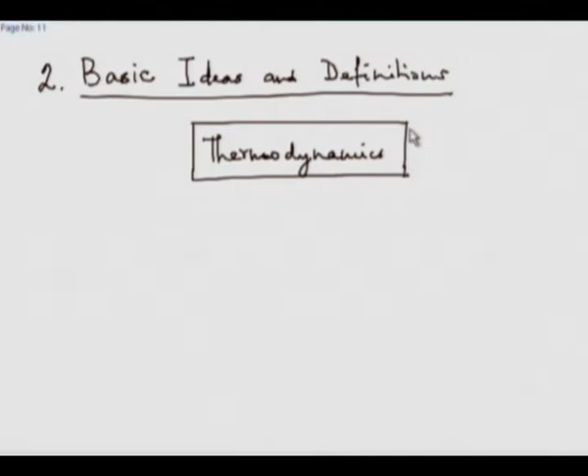But thermodynamics doesn't remain in an isolated box. It's a proper part of science, maybe a very proper part of physics. So it works with other branches of science: physics, chemistry, solid mechanics, whatever you have. You can't develop thermodynamics in isolation from other branches of science and other branches of physics. You can't study thermodynamics unless you study something in mechanics, something in fluid mechanics, at least the basic stuff. Something in geometry, which is also, in my opinion, a part of physics, on the borderline of mathematics and physics.

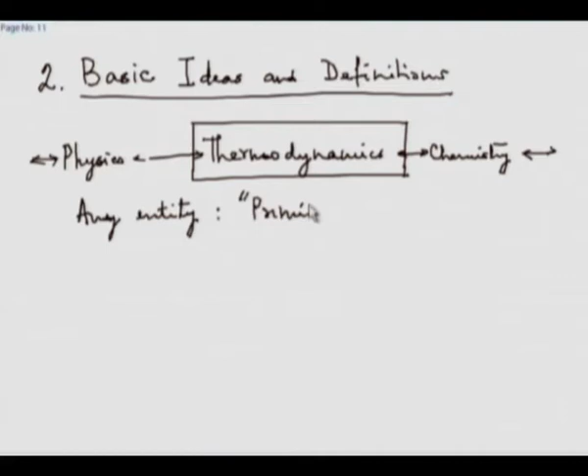So although thermodynamics defines its own ideas, thermodynamics inherits ideas from other branches of science, particularly other branches of physics. So any entity in thermodynamics, a property, a definition, an idea, a concept, will be called a primitive in thermodynamics. Primitives are those ideas, concepts, properties which are inherited or obtained from other branches of science: physics, chemistry, mathematics. Thermodynamics says, well, these ideas are defined in, say, geometry or mechanics or physics or electricity and magnetism. We know what they are, let the other branches of science define them and explain to us their characteristics. We will simply use them in thermodynamics as required.

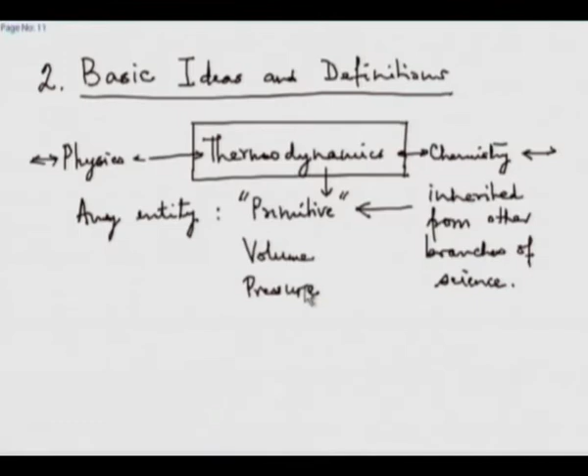So the ideas like volume, pressure, velocity, etc. These are all primitives in thermodynamics. We will not define a volume in thermodynamics. We will not define pressure in thermodynamics. In physics, pressure is defined as force per unit area. We will say that, look, physics says pressure is force per unit area. We will use it like that. It's a primitive for us. No contest. It is defined well by some other branch of science and we will use it.

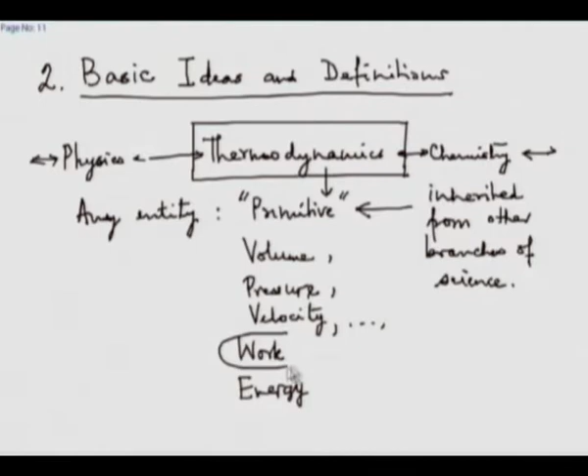There are some ideas which are not really primitive but are on the borderline of primitive. For example, the idea of work and the idea of energy. These are defined in other branches of physics. For example, work done when a force is applied against a spring and the spring gets compressed, very properly defined in mechanics. Okay. So the idea of work is a primitive, but thermodynamics will formalize this. Similarly, the idea of energy is also defined in branches of physics. For example, you have a mass, and with respect to a certain datum, it is at a height in a gravitational field. So, mass at a height has a potential energy that is defined in mechanics. We inherit that and consider that to be a primitive in thermodynamics.

There are other components of energy, for example, kinetic energy of a particle or a body moving with some velocity v, or an extended body rotating about some axis. This has a kinetic energy of translation or rotation associated with it. A fluid flowing has a kinetic energy associated with it. That is primitive, but will also be formalized in thermodynamics. Work is a primitive which will be formalized by thermodynamics. Energy is a primitive which will be, let me say, redefined by thermodynamics. But it is necessary for us to be very clear about what are the primitives in thermodynamics, because we are not going to spend time on primitives. We will say this is a primitive, that means it is defined by some other branch of science, typically physics, and is used in thermodynamics.

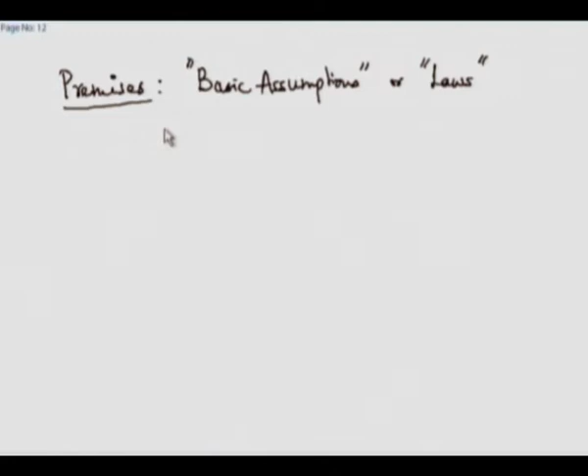Similarly, the idea of mass, the characteristics of mass, is a basic assumption in mechanics. And particularly the laws of Newton. In classical mechanics, there is no proof for the laws of Newton. They are basic assumptions of classical mechanics. The whole of classical mechanics is based on that. So these are premises which are basic laws. For us, there would be a number of premises. Our premises in thermodynamics, there are many. 3 of them are famous as the laws: zeroth, first and second, in some order.

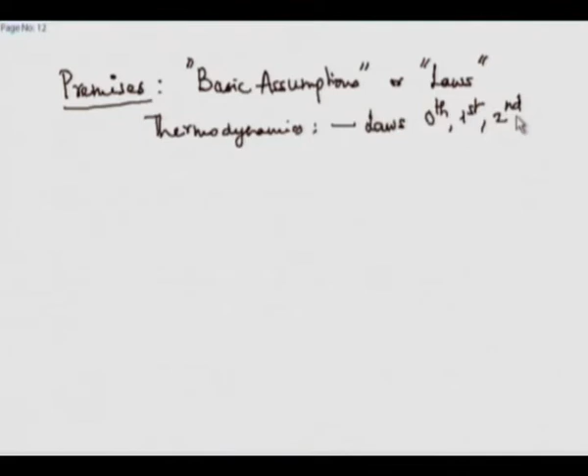But there are other premises in thermodynamics which for some reason have not yet been given the status of laws, but we will look at them as we proceed. For example, one premise is: any isolated system tends towards equilibrium.

This is a premise in thermodynamics. We say that if you wait long enough and don't disturb a system, keeping it isolated, we will find that it will reach a state of equilibrium. This is a premise. We have not yet defined what is a system, what is isolated, what is equilibrium formally, but since all of you have a background in thermodynamics, you at least partly understand what I am talking about.

There are certain other premises which are known as state postulates. This is one of them. Another one which we will come to is a premise which we are not conscious about, but which says that the state of a thermodynamic system can be defined using only primitive properties. Okay. This also is a state postulate. It is a postulate, it is an assumption, it is a premise. For some reason it has not been given the status of a law of thermodynamics, but unless we make that assumption we cannot proceed significantly in our study of thermodynamics.

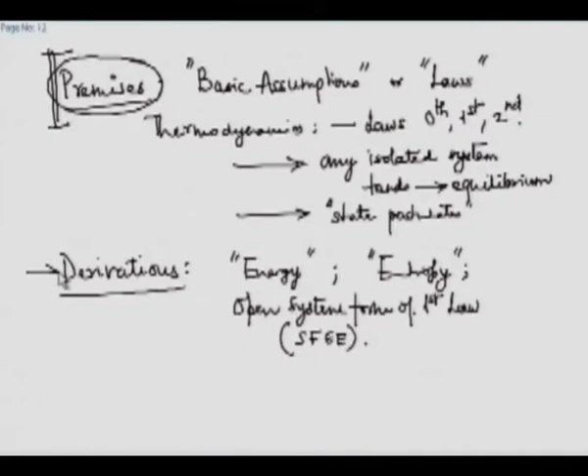Similarly, the open system form of the first law of thermodynamics, what we call the steady flow or steady state energy equation, is a derivation. Then the formulae you have for availability, exergy, etc. These are all derivations. Okay. Property relations, Clausius-Clapeyron relations, these are all derivations. So that is one part of thermodynamics, but the real understanding comes in appreciating the premises and undertaking the basic derivations as required for thermodynamics.

Now we come to definitions in thermodynamics. See, they say that a picture or a sketch is worth 1,000 words. But if we start using pictorial language, I think people will get very confused. So we have to use words and we have to give very specific meanings to those words. We have to define things like a system, we have to define a thing like a property, we have to define a concept called interaction. For all these we have to provide a definition, and we will be using definitions of essentially two kinds.

A definition, we say, is an explanation of something, so that something can be very compactly said in a word or two. So if you ask to define a human being, the definition of a human being will require something like 30, 40, 50, maybe more words depending on the detail you want to provide. But once that is understood, everybody understands and we can make out whether I am a human or not, whether this pen is a human or not. Okay. So we will be having definitions of essentially two kinds. One is a definition which is a short form.

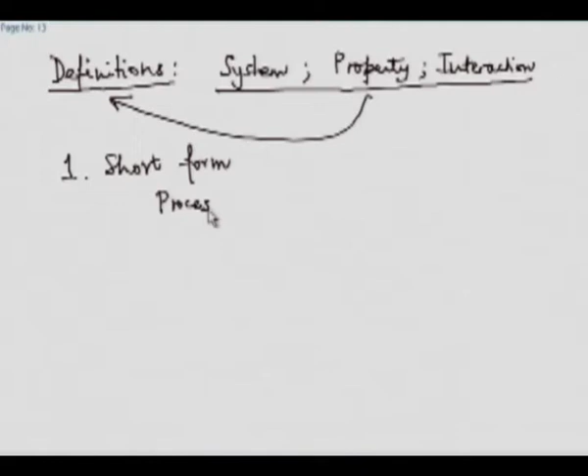For example, we will come sooner or later to this definition. We will say a process, a thermodynamic process, will be defined as, and I have this habit of writing 3 lines indicating that what I am writing is a definition, nothing but a change of state. That means that in any sentence, in any discussion, wherever I see the word process, I can replace it by the expanded form change of state, and the meaning should not change and will not change. Similarly, wherever I see change of state, if I have defined that as a process, I can replace change of state by a process.

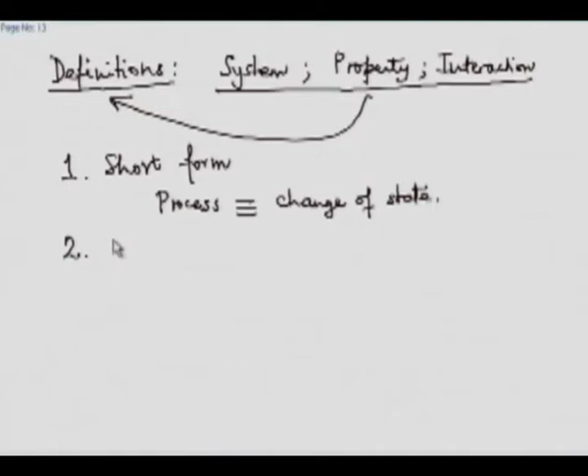These are absolutely equivalent, just the way 2 is equivalent to 1 plus 1 in mathematics. So, you can say 2 is defined as 1 plus 1. So, wherever in mathematics you see 2, you can replace it by 1 plus 1, or wherever you see 1 plus 1, you can replace it by 2. So, these are just short forms. The second one, and perhaps the more important one, is an operational definition.

Now, an operational definition, as the word goes, defines something, a property, a characteristic, a procedure, whatever, by defining a set of operations to either take a decision or to make a measurement and quantify.

For example, black. I say the color of this pen is black. What is the operational definition? I say that in any form of light, if I look at it, I find nothing reflected from it, and hence I call it black. It absorbs almost everything which comes onto it, so it is black.

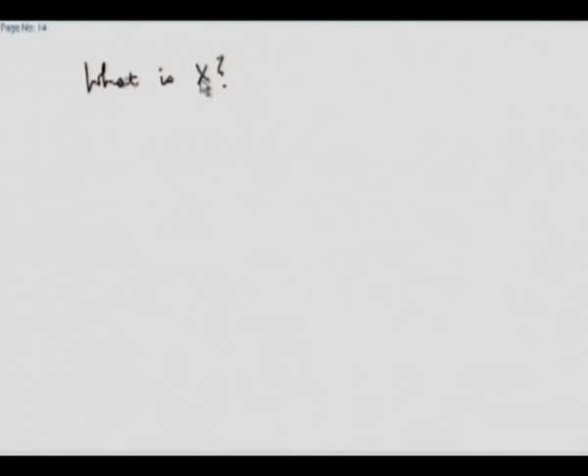You ask, what is x? And you will say x is y plus 3 by 2. Fair enough. Then you say, okay, now explain what is y. And you will say y is 2x minus 3. What have you done? You have defined x in terms of y and you have defined y in terms of x. You know a relation between x and y, but you can't get either the value of y or the value of x.

There is a book by Knuth, I like to refer to that, on computer programming, in the index of which, if you try to see circular definition under C, it will say: see definition, circular. Fair enough. Then you go to D in the index, and in definition, among various types, you have circular definition, and for circular definition he says: see circular definition.

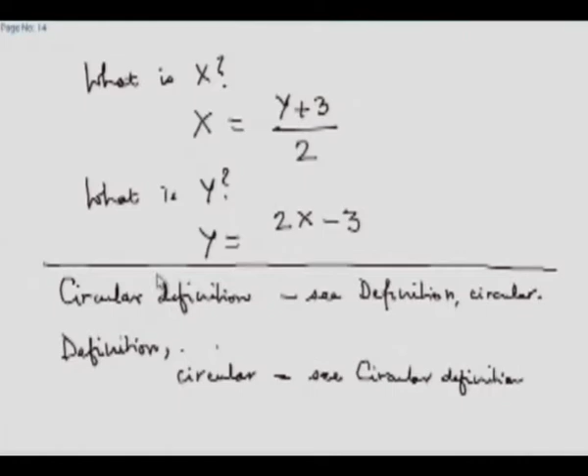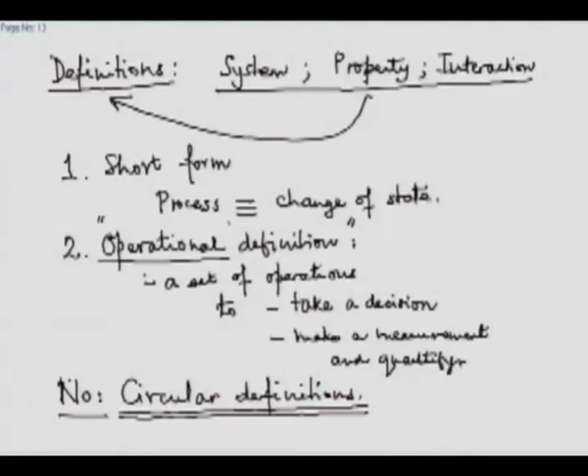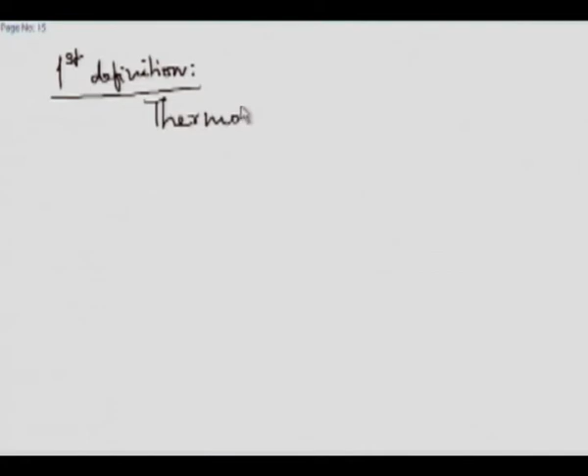So all that you do is go in a circle. That is exactly the meaning of a circular definition. It makes you appreciate what circular definition is without telling you exactly what circular definition is. We do not want to get into any such trap, and hence we are going to essentially look at operational definitions. Now let us start our study of thermodynamics by defining our first definition. And that is, we will now define a thermodynamic system.

We are going to have an operational definition. So we are going to say how do we decide whether a given entity is a thermodynamic system or not. If you look up the books, you will find a thermodynamic system is a region of space in which we are interested. It may contain mass, it may contain energy, it may contain both. It will have some boundaries, some real, maybe some imaginary, some flexible, some inflexible, all sorts of things.

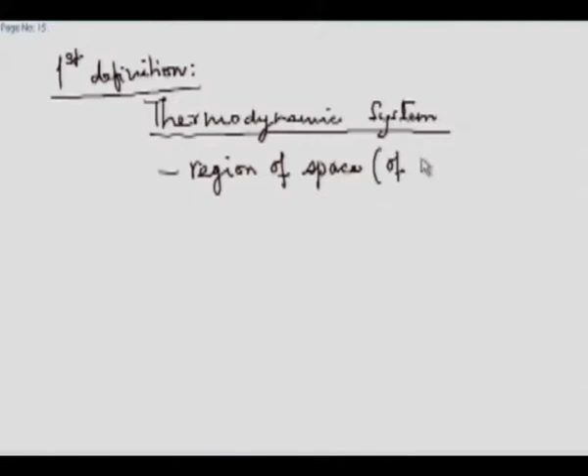For us, a thermodynamic system will simply be a region of space of our interest. This is important because a thermodynamic system is never dictated to us by nature. It is we who define a thermodynamic system.

So it is a region of space of our interest, the way we define it, and of which the boundaries are fully defined. By fully defined, we mean that it must be a completely enclosed space, that is all. And fully defined means that at any instant of time, we know what the location of the boundary is.

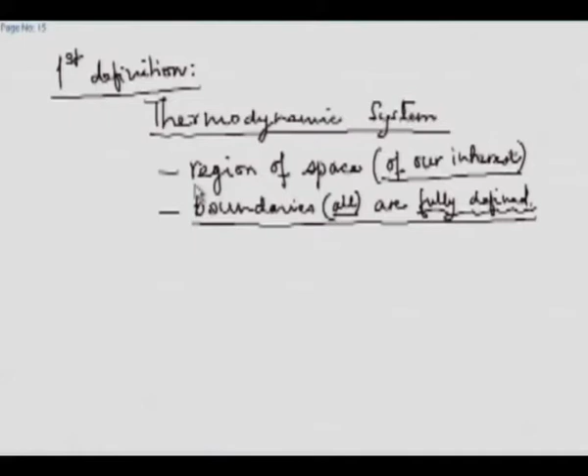So that means any properly bounded zone of space, whatever be its content, maybe from pure vacuum to very densely packed stuff, is a candidate for a thermodynamic system. Only when the boundaries are defined, a system is defined. If the boundaries are not defined, the definition of a system is not complete. So the importance of a system is that its boundaries must be well defined, and that automatically means that it is a region of space.

Sometimes we say that it is absolutely necessary for us to know what is inside a system, but from a thermodynamic point of view, it is not necessary for us to really know what is inside the system. If we know something about it, it's okay, but if we know nothing about it, also that is okay. From a basic or pure thermodynamic point of view, we don't have to know what is inside a system.

So is this an operational definition? I think it fits the candidature of an operational definition because we can define whether a given entity is a thermodynamic system or not. All we have to see is whether the boundaries are properly defined. If it is so, then it is a thermodynamic system. If it is not, well, it is not a thermodynamic system.

Now, a question that almost always comes up is: is the sun a thermodynamic system? The answer is yes. If we can define the boundaries of the sun and say that it is, say, a sphere or an ellipsoid with this center and these coordinates, this radius or these axes, then well, it is a thermodynamic system. Then the question is, is the solar system a thermodynamic system or not? Then don't just say the solar system, define that region of space in the Milky Way galaxy which you call the solar system, define its boundaries, and you have a system.

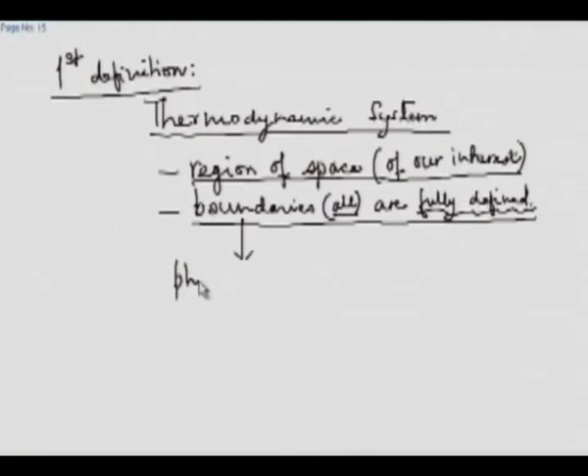It is important to know that the boundaries may be physical, as the boundary of this surface of paper, or if you have a glass of water, the inside of the glass of water, it is a boundary. Or it could be imaginary, not in a mathematical sense, it could be purely defined at some surface which you can imagine with some coordinates, but which is not a physical surface. It could be physical, it could be defined. The boundaries could be flexible, they could change shape and size.

It is also possible that the boundaries may be continuous, like a single drop of water, or the boundaries could in some cases even be discontinuous. You take the drop of water and maybe make it into two small drops of water. You have two disjoint boundaries, but it is possible to consider that as a single thermodynamic system.

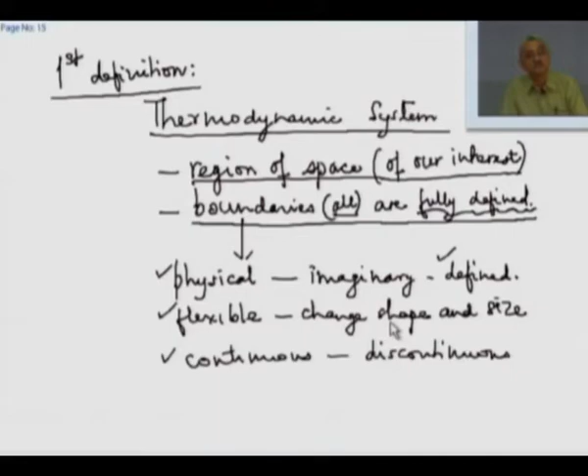Continuing with our discussion on the boundaries, which came out of the idea of what a thermodynamic system is. And I think you have already appreciated the importance of boundaries, because unless a boundary is there and it completely encloses a region, we can't call that region a thermodynamic system. Now, what type of boundaries can these be? I have already listed here, some boundaries are physical, some boundaries can be defined, some boundaries can be flexible, some boundaries can be inflexible, solid. Let me take some illustrations.

Being mechanical engineers, we are used to engines. We know our IC engine and refrigeration compressors are cylinder piston arrangements. The old steam engine, many of our reciprocating pumps are cylinder piston arrangements. So you typically have a cylinder, generally closed, and a system.

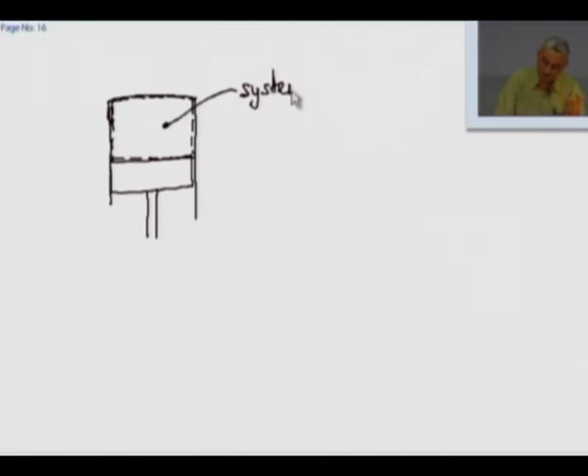Now let us say that the innards of the cylinder, the inner surface of its head, the cylindrical part, and the top surface of the piston. These are boundaries which enclose a region of space, and so this is our system. It may contain a liquid, a gas, or whatever.

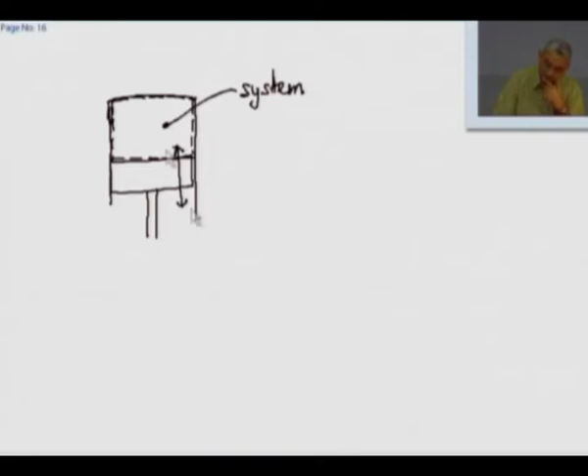Then during some interaction, the piston may move up and down. What happens to the boundaries? First, all the boundaries are physical boundaries. You can see them, you can touch them, can characterize them. Okay? Real surfaces, real physical surfaces. You can disassemble it, feel the top of the piston, feel the inside of the cylinder head and the surfaces.

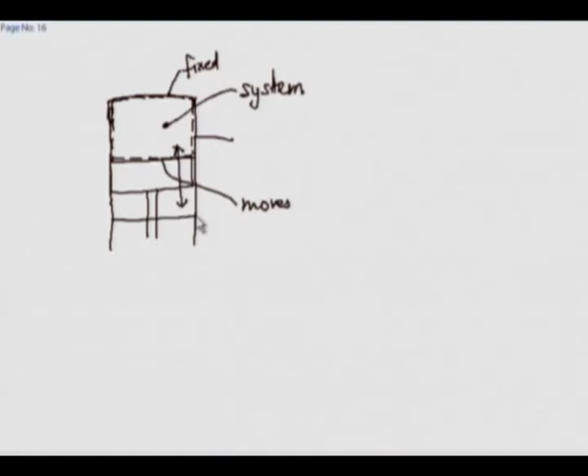As the piston moves up and down, the cylinder head boundary remains fixed, no change in it. The top part of the piston boundary, this boundary moves up and down, different locations at different times. The side boundaries, sometimes they are short. If the piston goes down here, the piston head boundary moves here, the side boundaries extend. So these are extensible boundaries. These are illustrations of physical boundaries, some fixed, some moving, some extensible.

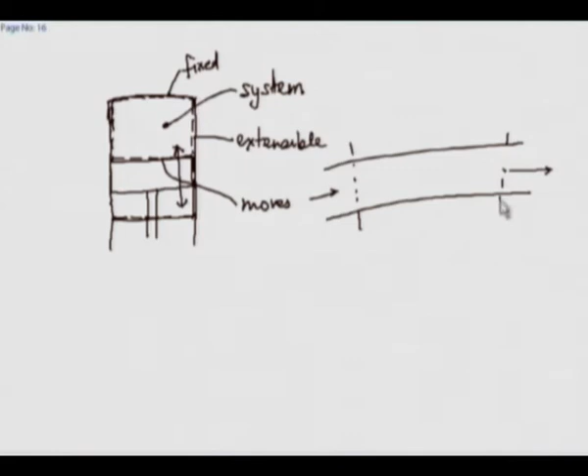Sometimes we will take a system, you take a section of a pipe through which some fluid is flowing. And we say that, look, we are interested in what happens to the fluid as it moves between this plane and this plane. And we can define the system as the following boundaries. The inner surface of the tube from plane A to plane B, and the surface of plane A as it cuts through the tube, the surface of plane B as it cuts the tube. The boundaries A and B can be sketched on a drawing, but you can't feel them. We have put them there as dotted lines.

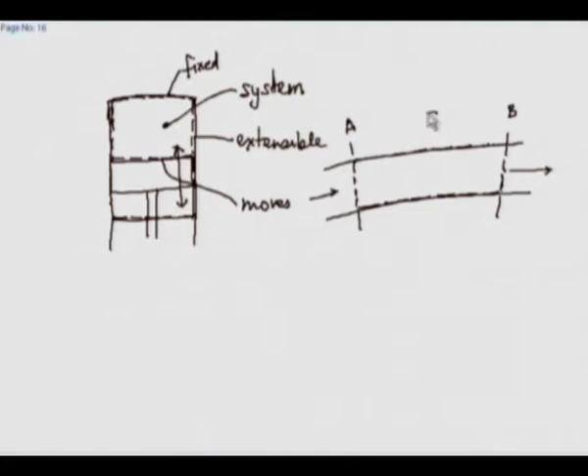So these are illustration. The inner surface of a tube is a physical boundary. This as well as this, these are imaginary or defined boundaries. During a process, I may move this boundary B further in and out, but at any time I must know where my boundary B is. Similarly, A I can move in and out, but at any time I must know where that boundary is.

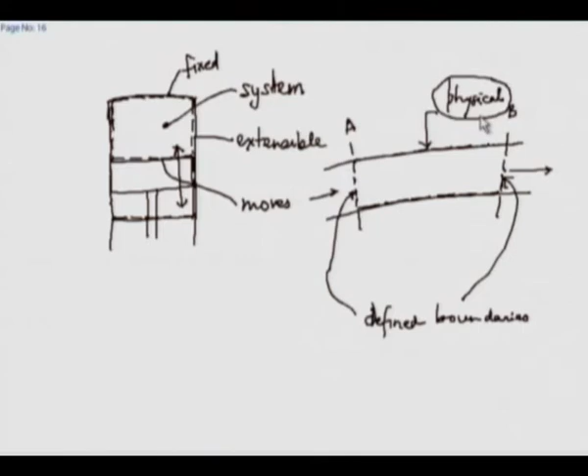The tube may be flexible. This may be a physical boundary, but it's a rubber tube. I can pump in high pressure water and it can expand. It could be flexible. The arteries and veins in our body are illustrations of such flexible boundaries. And I can say plane A is the exit of my heart and plane B is the inlet to my lungs or something like that. So this is an illustration of an imaginary boundary.

Another illustration of a system consisting of purely imaginary boundaries is this. In fluid mechanics, we derive the so-called continuity equation, a differential equation representing the conservation of mass. In heat transfer, we derive the differential equation of conduction, a differential equation representing a combination of Fourier's law of heat conduction and the conservation of energy, or the first law of thermodynamics. To do this, we say, imagine a control volume of size delta x by delta y by delta z.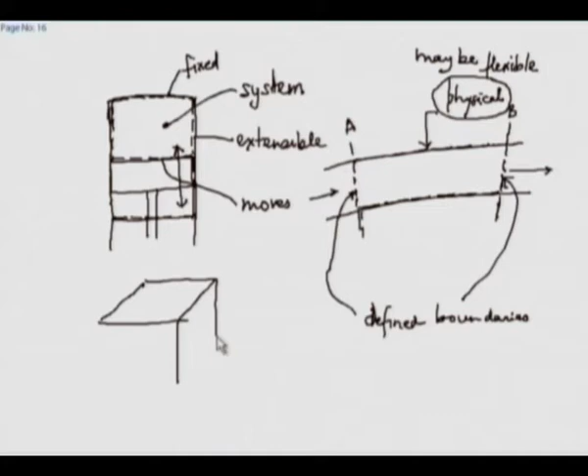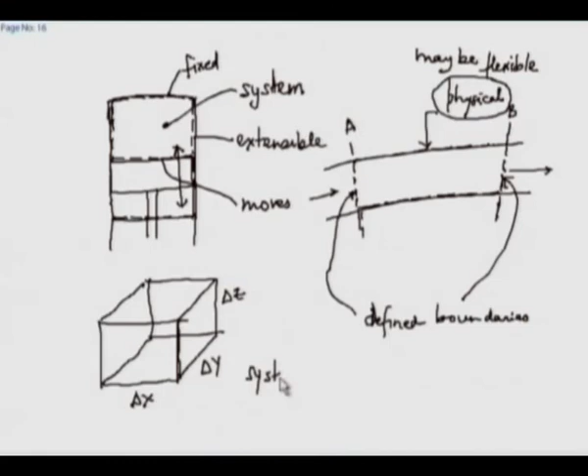Take any good book on fluid mechanics or heat transfer, or even on solid mechanics, where differential equations of equilibrium are, and we say let this be delta x, let this be delta y, let the third dimension be delta z, somewhere in our domain of interest. Now we are defining 6 surfaces enclosing a small system. This is a thermodynamic system, but all its boundaries are defined. None of them is a physical boundary.

You say let this be some point x, y, z. So you can locate all the 6 surfaces and you determine how much mass comes in from which surface, how much mass goes out from which surface, and write a mass balance and derive a differential equation. This is an illustration of a system made up of purely imaginary or defined boundaries.

But at any time we know what is the location of each and every boundary. But I cannot touch the boundary. I can't touch my finger to it. If I try to put a finger it will go through because there is no real boundary associated with it. Now boundaries are important not only from the point of view of defining a system, they are also important from the point of view of what happens to the system. If you change the boundaries of a system, you are creating a different system.

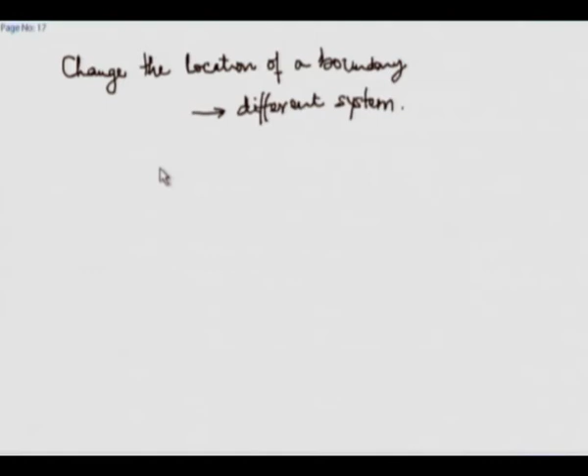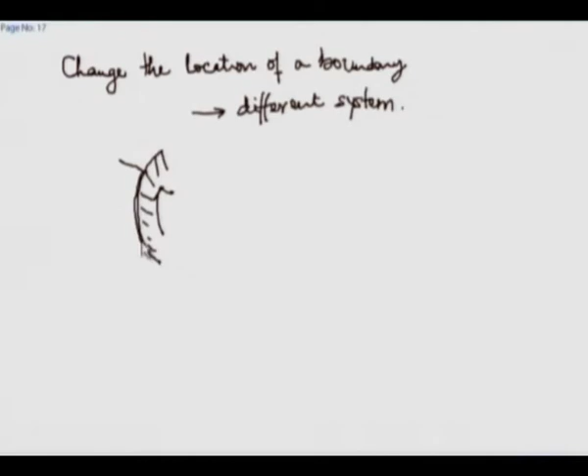Take for example a simple brake. You have a drum, I am showing only a part of a drum which is rotating, and there is a brake shoe which is being pressed against it. And I want to study the interaction between the shoe and the drum.

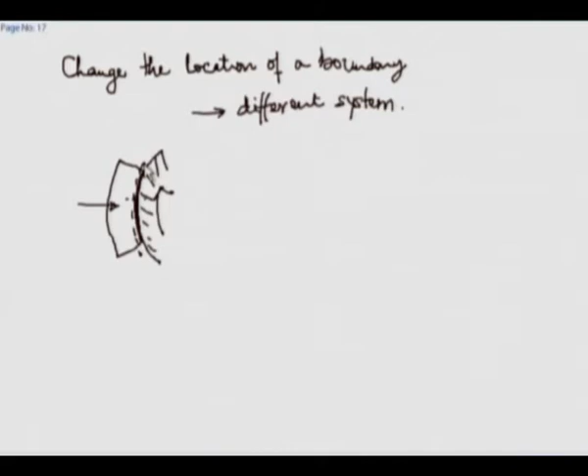There is a boundary between the shoe and the drum, and I can define my system, say of the shoe, with a boundary just inside the shoe and the other boundary of the physical extent of the shoe. This is one system. Then I can have a system in which the boundary is exactly the interface of the shoe and the drum, and the third boundary which is slightly inside the drum. So these three boundaries define three different systems.

And later on maybe we will come back to this as an exercise or a homework. The interaction between the drum and the shoe will be discussed, and you will realize that as you change the location of the boundary, maybe just by a few millimeters, in one case inside the drum, in another case inside the shoe, you will find that an interaction which you are confident to be work interaction turns out to be purely a heat interaction, just because you have changed the boundary. But remember, there is no contradiction here.

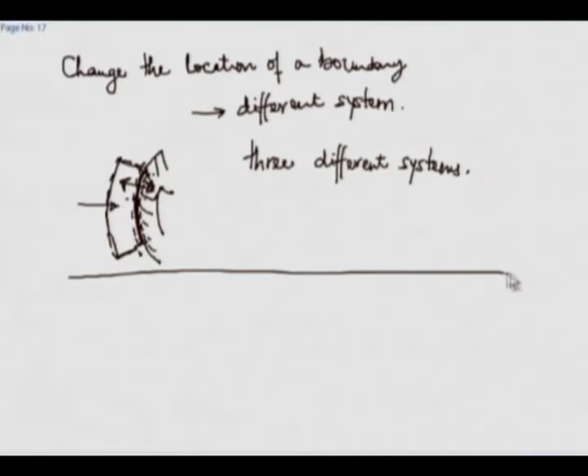You have changed the boundary, so you have changed the system, so you have changed everything. So if an interaction of the work type now turns out to be an interaction of the heat type, there should be no surprises in it. Okay. We will come to this later. This was just an illustration of something which is going to come up later. Now let's stop the thing here.

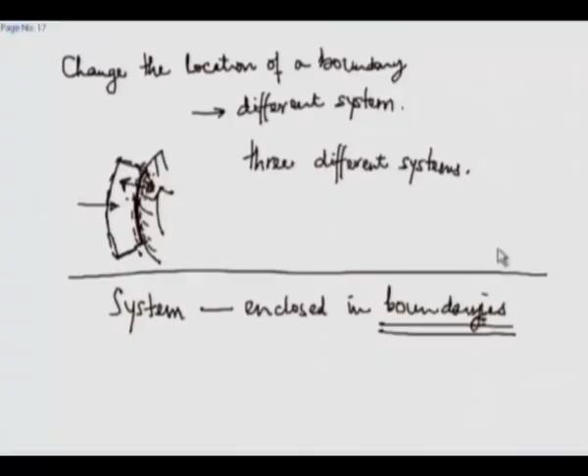We have defined what is meant by a system. System has to be enclosed in boundaries of some type or the other, physical or purely defined, fixed or flexible or extensible, etc. We know what the importance of boundaries are. So a system and its boundaries are one and the same. Boundaries define a system, system is defined by its boundary. So enclosed space defined by boundaries. The next thing is what typically we talk about is classification of systems.

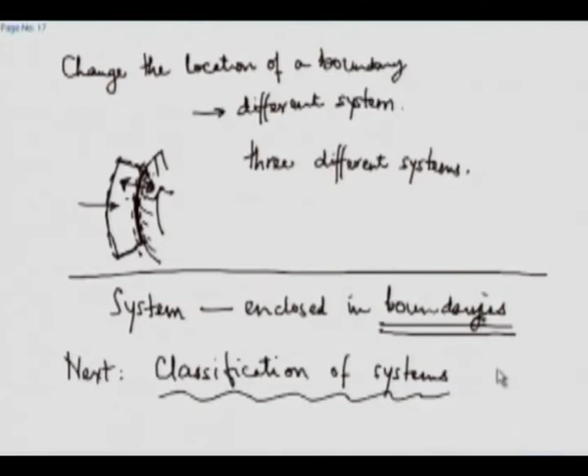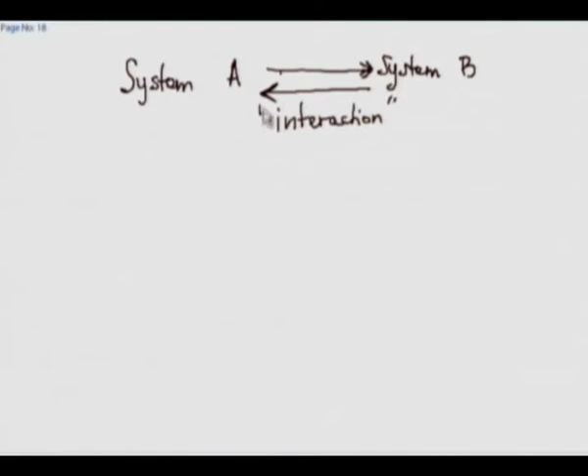Now in thermodynamics, we will never talk about just one system. In thermodynamics, we will always talk about a system A and a system B, almost always. And we will say system A and B, they interact with each other. There is some sort of a transaction. They talk to each other, they play with each other, there is a give and take. We will define an interaction later. But there is some sort of an interaction, a transaction you may call it. Something is given, something is taken.

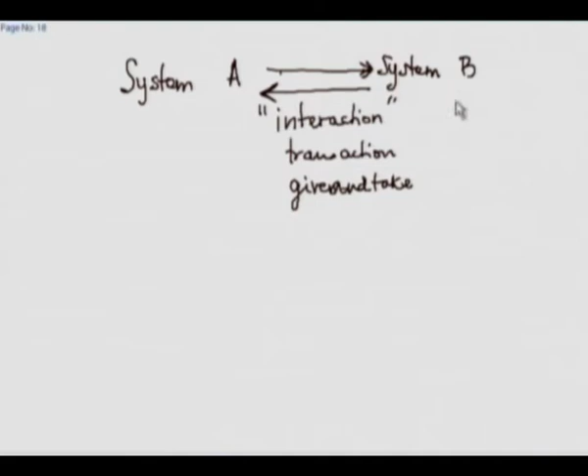Okay. Many textbooks define a system and the surroundings. Surroundings are defined as something which is outside the system. But let us not be so vague. For us, the surroundings is also a system. So its boundaries also have to be defined properly. So, the surroundings is as much a system in its own right as is our main system.

Actually, it would be better to talk about a system A which is interacting with system B, because if we say that surrounding is whatever is outside the system and leave it without defining its boundaries, then we are going to get into trouble, because then we have not defined the surroundings as a proper thermodynamic system. And the laws of thermodynamics are applicable only to systems which are properly defined. They are not applicable to systems which are not properly defined thermodynamic systems.

So, although we may be using the word surroundings, we will define it as a system B which is next to system A and is interacting with it. Okay. So, keep that in mind, because many textbooks will keep the definition of surroundings vague. We will not leave it as vague. We will say that the surroundings is a system in its own right, very properly defined, and hence all its boundaries will also have to be defined.

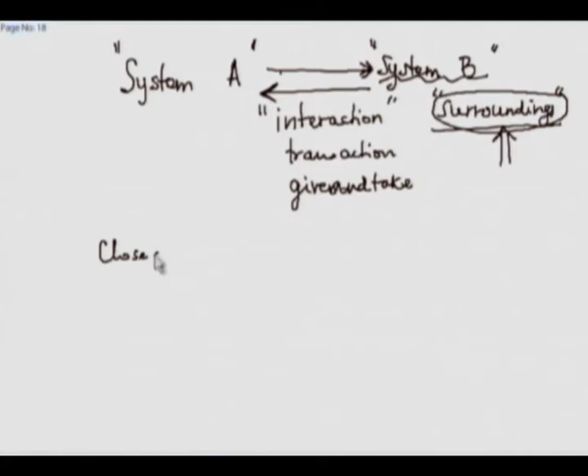We may call this the primary system, which is of primary interest to us. This is a secondary system in which we are not that much interested. Maybe we do not want that much detailed study of the system, but it is a system in its own right, although we may call it a surrounding. Okay. Now, in the classification, usually, we have a closed system, or we have an open system, or we have an isolated system.

I have a problem here, because a system by itself with its boundary defined cannot be closed, open or isolated. This classification should come slightly later, because this classification pertains to systems undergoing a process. We have not yet defined the process, but a system is just there by itself, not interacting with any other system. Then there is no question of its being closed or open or isolated.

A system by itself is something which is enclosed in boundaries. We do not ask what is happening to it. Only when we talk of a process, we talk about what is happening to it. Okay. So, actually we should push this definition after a study of processes, but most textbooks will talk about this classification just after the definition of system. So, let us get it over with. All this has to do with interactions. Again, we have not defined a process, so we have not talked about interaction. But let us get over it.

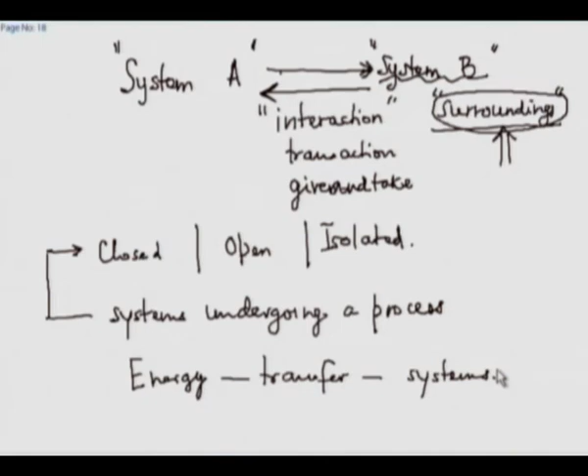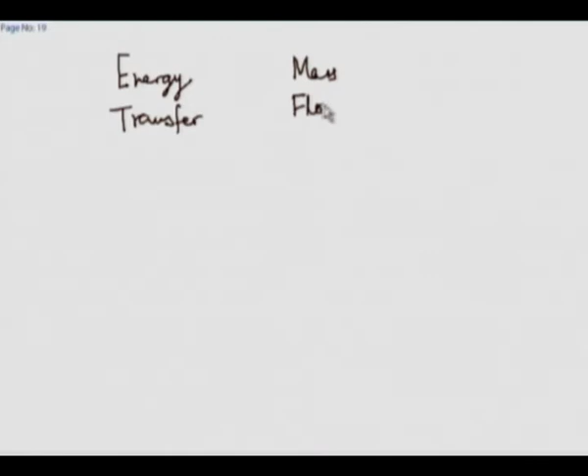We have said the science of thermodynamics talks about energy and energy transfer between systems. Okay. So, unless there is an energy transfer, thermodynamics does not take much interest in that. So, what we will do is we will put 3 columns or 2 columns: energy transfer, mass flow, and name. If we say energy transfer is allowed, that means system A can do either work or transfer heat to system B.

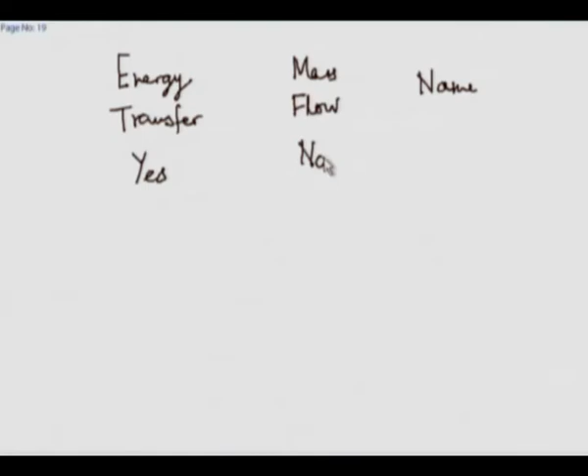Again, work and heat we have to define. We are just overtaking that just to complete this definition. But no mass flow is allowed across the boundaries of the system. Then the name given to that system is a closed system. Okay. If energy transfer is allowed and mass transfer also does take place, then we call the system an open system. If, on the other hand, no energy transfer is allowed and no mass transfer also takes place, then we call that system an isolated system.

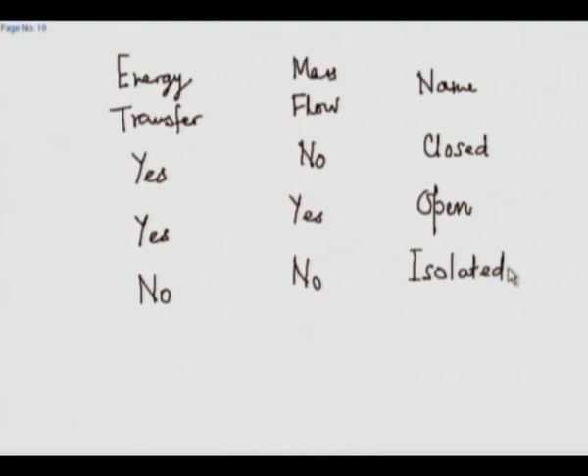This is the classification. Now there are some slightly different names which are also used. For example, the closed system. There is no mass flow across the system boundary, so the mass of the system remains fixed. So quite often a closed system is also known as a control mass, indicating that the mass is controlled or constrained to remain within the system. Unfortunately, for some reason, the open system has a very common name called control volume. This is unfortunate because control volume and the short form CV is so common that quite often in textbooks the subscript CV is used to represent an open system.

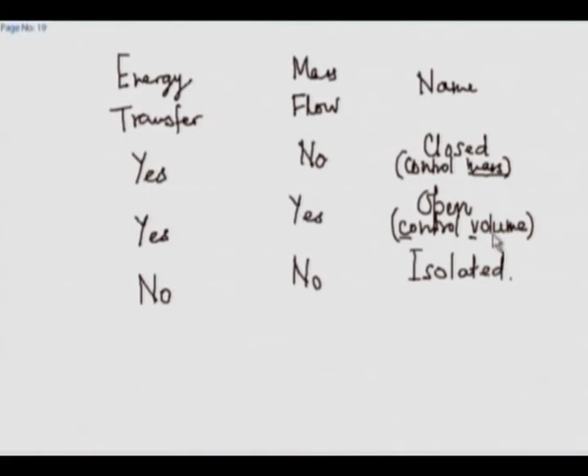The unfortunate thing is, in a control mass, a closed system, mass is fixed. It does not change because there is no mass flow across the boundaries. But in an open system, the volume need not remain fixed. The volume can decrease or increase. So the volume is in no way fixed. It may be controlled in some way, but it is in no way fixed. So don't be under the idea and don't let your students absorb the definition of an open system as a control volume, where they appreciate control volume as a fixed volume. It is not a fixed volume.

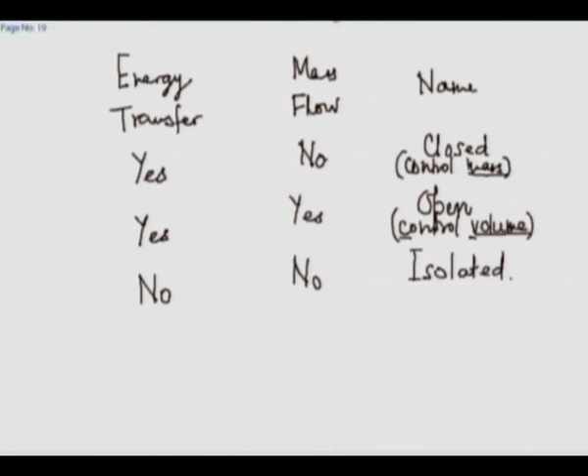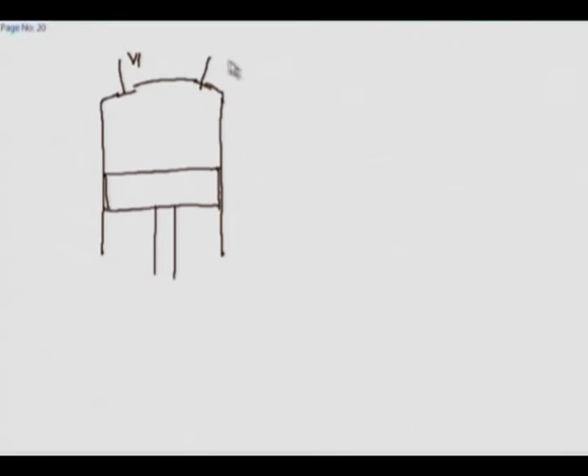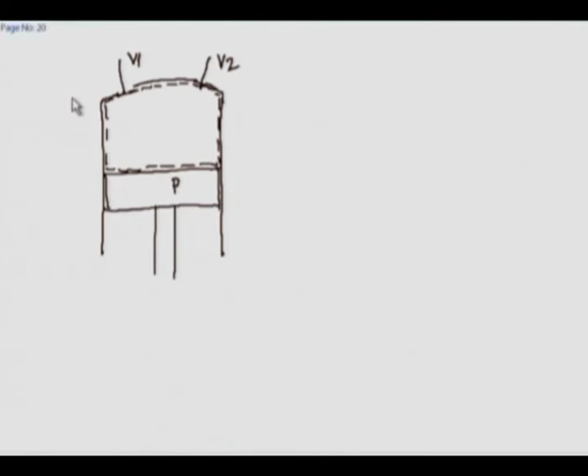And for that, we again take our common illustration of a cylinder piston arrangement. Again, I will show a cylinder and a piston. And let me say it is part of a pump or an engine or a compressor which has two valves. Valve 1, valve 2, piston P. And let us say that again our system is whatever is within this domain. I say that both the valves are closed. What is the type of the system? Our system will be a closed system.

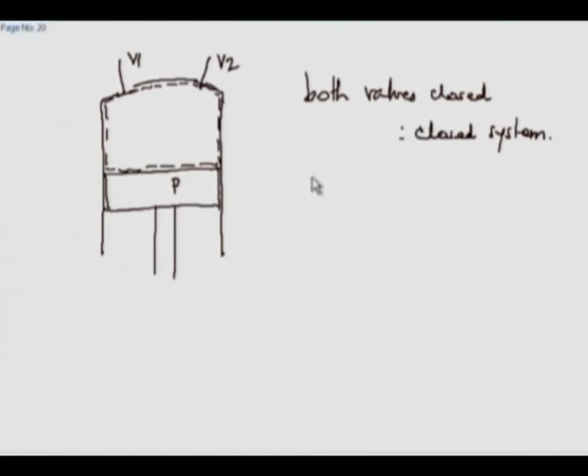Now, if say one valve is open, then do you say it is an open system? The answer is open system only if fluid is flowing in or out of that valve. Otherwise, just because a valve is open does not automatically make it an open system.

Take this illustration. I am thirsty, so I see this water bottle. Show me. So I am thirsty, I see this water bottle. Now I am teaching thermodynamics, so I look at it and say, is this a system? And I say, yes. I may define the system as the inner surface of the bottle, including the inner surface of the cap. So it may contain inside partly water, partly air. Or I may define the system as water itself.

So what is the system? The surface of the water, that is wherever it is in touch with the inside of the bottle, plus the top surface of the water. I am neglecting the evaporation of water. So if I move it, the top surface and even the side surfaces are extensible, flexible, they can be as complex as they like. But if I neglect evaporation, it is a closed system. Again, let me say that my system is water and air above it. I open the cap.

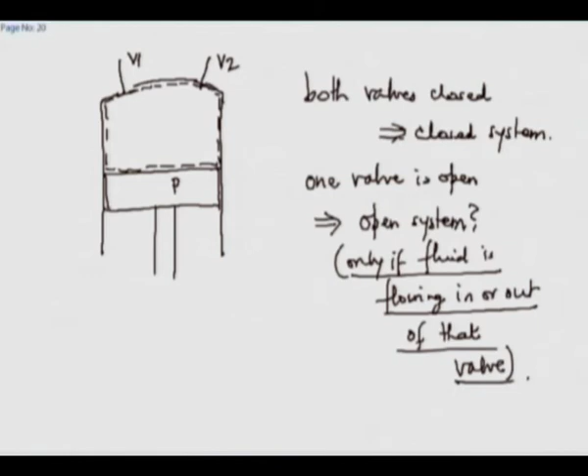The thing to remember here: a system by itself cannot be open or closed. We have to look at the process, which we will soon come to, and then decide whether it is an open system or a closed system. So remember this, that only when you look at the process of a system can we assert that a system is open or closed or isolated.

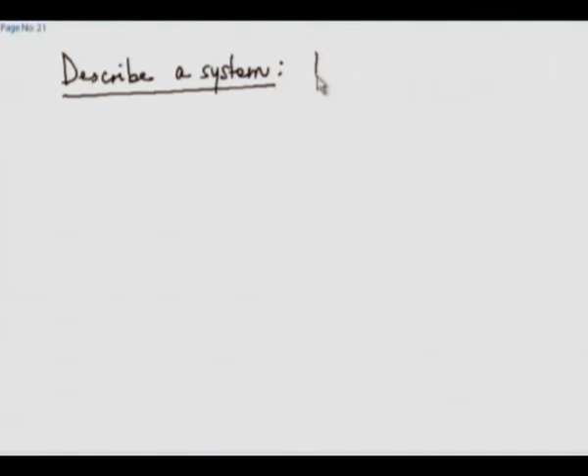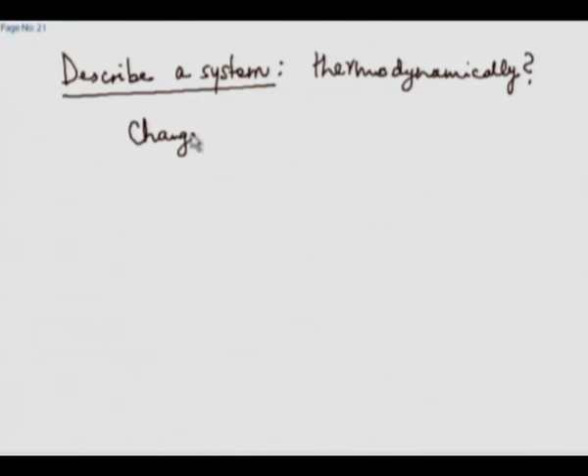Now, how do we describe a system? We describe a system in a thermodynamic fashion. So, how do we define a system thermodynamically? See, we are interested in the following. We are interested in the change of a system. In what way has it changed? That bottle which was my system earlier had lots of water, now it has a lesser amount of water. So there is some change in the system.

Maybe initially the water is cold, I hold it tight in my hand, warming it up. Maybe the temperature had changed. We have not defined temperature, so don't be in a rush to assume that I have defined temperature. We will do it much later in the course. So something has changed in the system. So we describe the system by defining the state of a system. That means we have to define what is meant by the state of a system.

Okay. And now we come to the second important definition, the state of a system. And the state of a system will bring us to the third important definition, the property of a system. The operational definition of the state of a system is this. The state of a system is defined when we do the following. Two-step process. List all relevant characteristics of the system.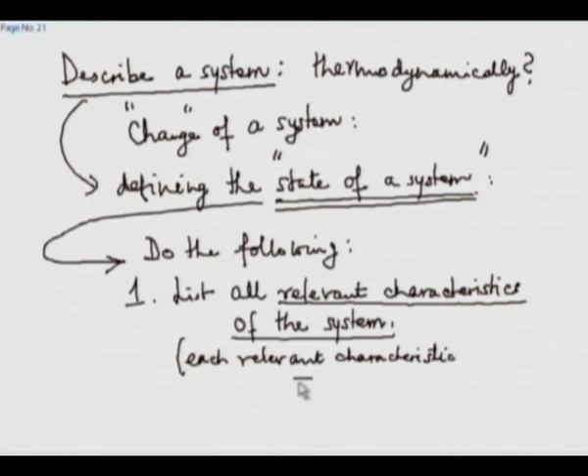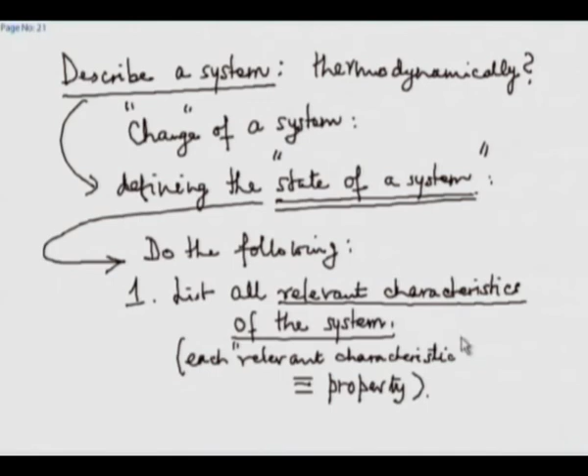And I will jump the gun slightly. Each relevant characteristic we will shorten to one word: property. Each relevant characteristic is a property. So, let us take an illustration.

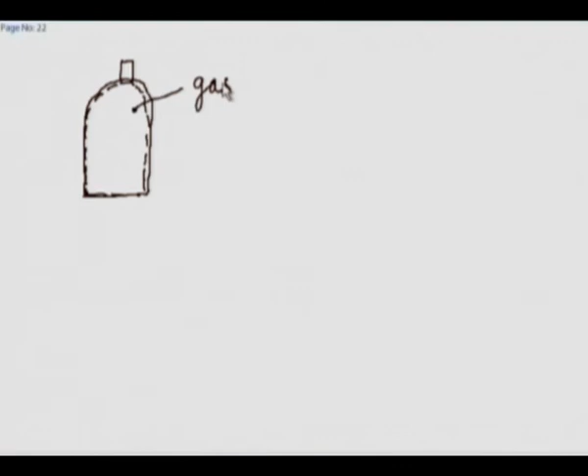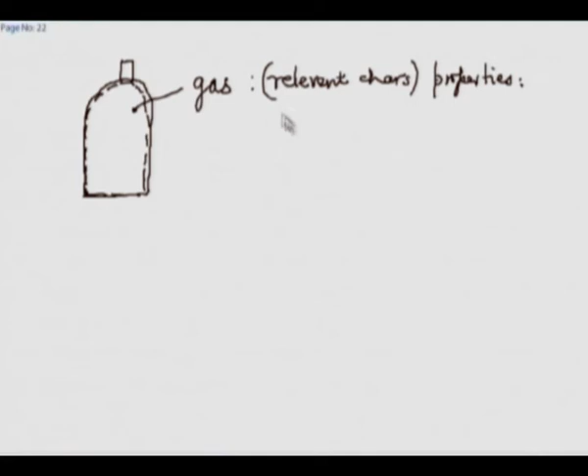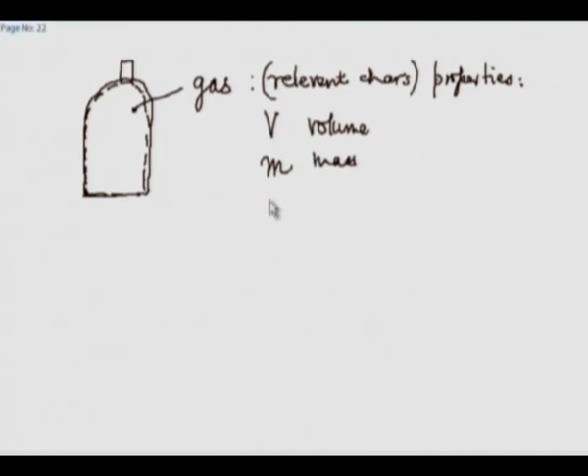Okay. And let us say that the inner surface of this is our system. It contains a gas, and we are going to do some funny things with the gas. So, we want to know what happens to the gas. So, we will list relevant characteristics, that is, properties. Now, maybe we will say volume is a relevant characteristic, maybe mass is a relevant characteristic, pressure may be a relevant characteristic.

We have not defined it, but we know something about temperature, a relevant characteristic. Okay. Now, the shape of the cylinder, whether it is spherical or cylindrical, is it a relevant characteristic? We do not know. It all depends on what we are going to do with it. The cylinder may be lined inside with rubber or glass, or painted inside with some anti-corrosive paint. The type of paint, the type of lining, is it going to be a relevant characteristic? We do not know. It depends on what we are going to do with the gas.

So, all that we appreciate is, if we start looking at the detail, we can come up with a long list of characteristics. Not all of them may be relevant. Relevant characteristics will be only those which are of use to us, in which we expect to see any difference or change during our play or process of the system. So, how to decide on the relevance? Thermodynamics does not tell us anything about it. It is only out of experience that we decide.

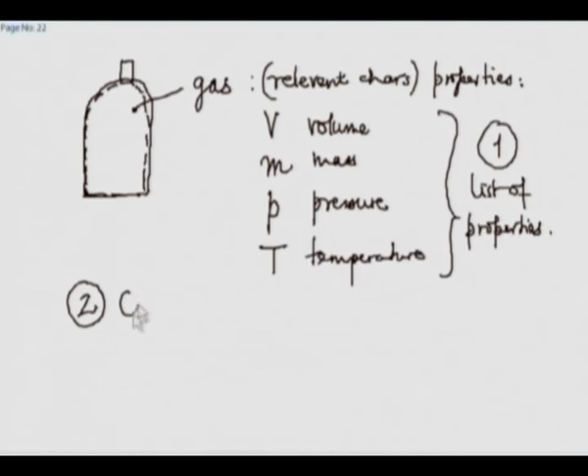The second step is to quantify the properties. That means we must do an experiment or we must do some measurement to provide numerical values to each of these properties. Maybe we can use some geometric tricks to measure the volume. Maybe we can use a weighing machine or a mass balance to measure the mass. We can fix up at the top of the bottle or the cylinder a pressure gauge to measure the pressure. We can insert a thermometer to measure the temperature.

And maybe we will come up with results like volume is 1.2 meter cube, mass is 20 kg, pressure is 6.9 bar, temperature is 32 degrees C.

So, what we have here? We have a list of relevant characteristics, that is properties, and its quantification. That means to each of these properties we have assigned a numerical value. That means we have quantified, a quantity is associated with it. And be sure each quantity will have a numerical value and a unit of measurement associated with it. When it comes to solving problems, we will again emphasize this, the various units and their significance.

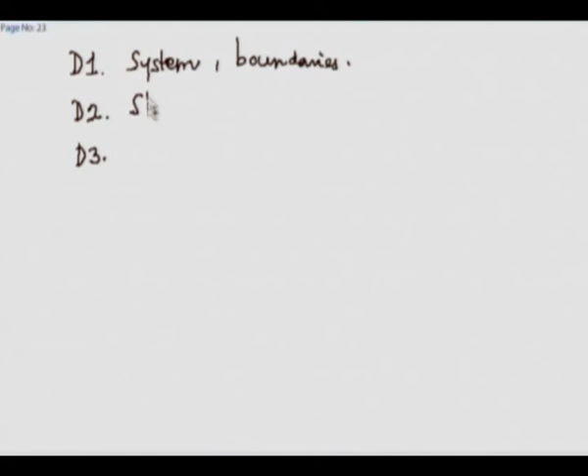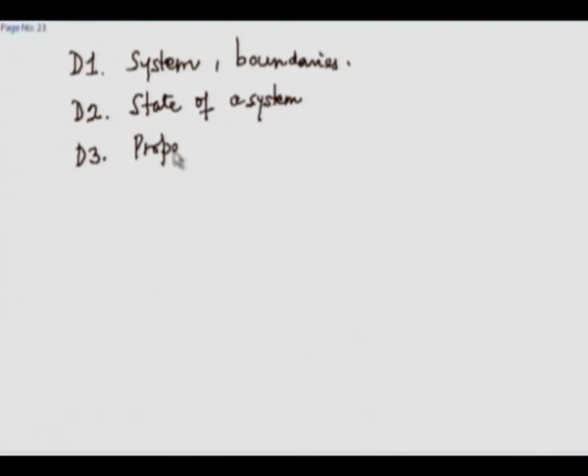So, when we do this, we say that now we have defined state of our system. And while doing this, our definition 1 was system, and along with that we understood the importance of boundaries. The second definition and third definition more or less went together. State of a system, and property or properties of a system. The property of a system, again emphasize, is a relevant characteristic. Singular.

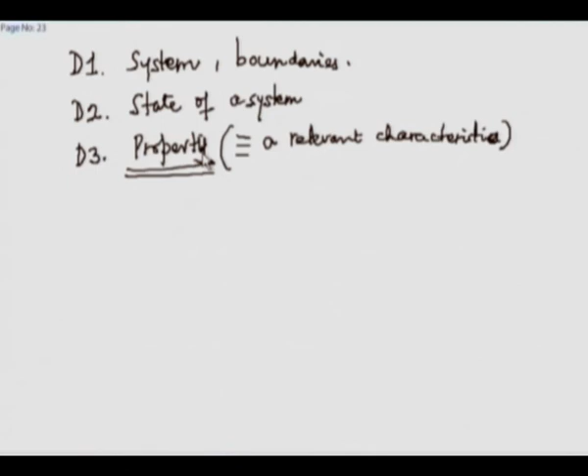Okay. Now, let us discuss something more about the properties. Just now we have seen, and for simple gaseous things we have listed out volume, mass, pressure, temperature as properties. Later on we will come across energy E, enthalpy H, entropy S, maybe kinetic energy, thermal energy. These are all typical properties that we come across in thermodynamics. So, let us look at the classification of properties.

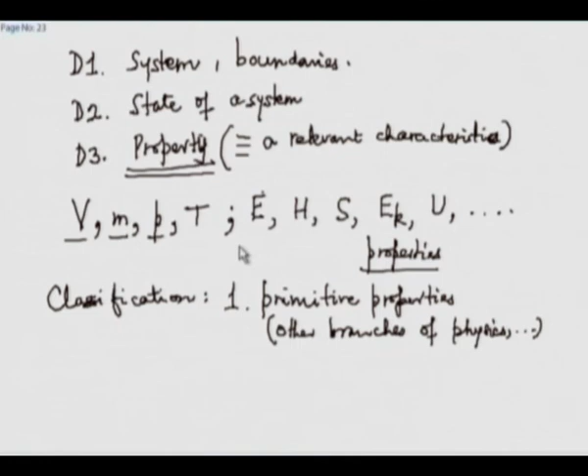You will notice that some of these properties, volume, mass, pressure, are defined in other branches of physics. So, that means these are primitives. So, one way of classification is primitive properties. These are defined in other branches of physics, and they are just inherited by thermodynamics. Physics or chemistry or geometry, whatever. So, volume comes out of geometry, mass comes out of mechanics, pressure comes out of mechanics, fluid mechanics, whatever. And later on velocity, kinetic energy, potential energy, electrical energy, all these things are primitive properties.

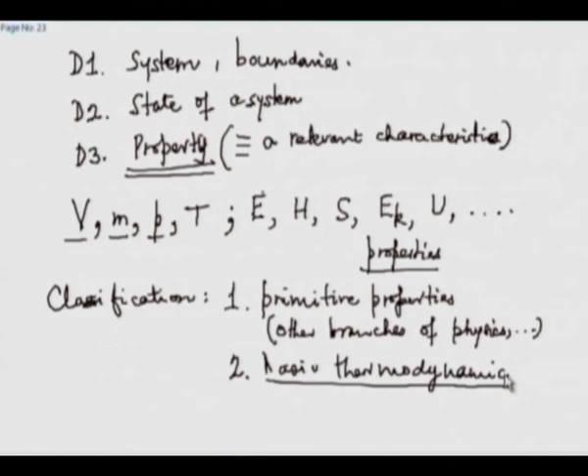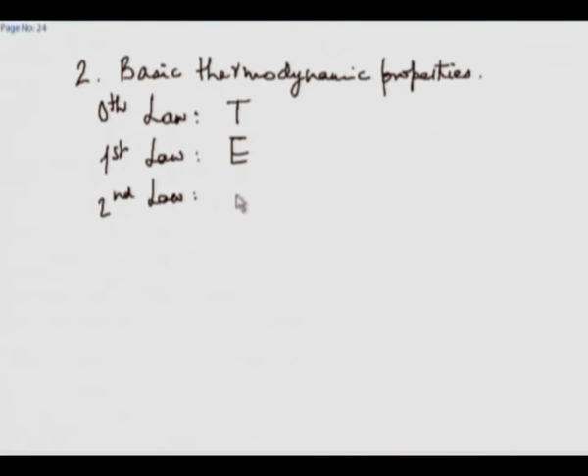A property can be primitive, a property can be basic thermodynamic. A basic thermodynamic property is a property which is defined using the laws of thermodynamics. We will soon see that the three laws of thermodynamics which we are going to study, zeroth, first and second, each one of these laws will help us or will force on us a basic thermodynamic property. Zeroth law will define temperature, first law will define energy, second law will define entropy. And these three and only these three are basic thermodynamic properties.

Right? Out of which E has a special status because energy is defined not only in thermodynamics but in other branches of physics. So, the thermodynamic part of this, later to be known as the thermal energy, U, you can consider as a basic thermodynamic property. But the fact remains that there are just three basic thermodynamic properties, one for every law of thermodynamics. Zeroth law helps us with temperature, first law helps us with energy, second law helps us with entropy.

And the third one is derived thermodynamic properties. These are properties which are combination of properties. And they are useful because these are useful short forms. Perhaps the most famous of this is enthalpy. We will find that the combination of property U plus PV comes up so often in thermodynamics, particularly when we look at fluid systems or open thermodynamic systems, that we find it useful to define one letter for it and call it enthalpy, H. Okay. Later on, you will even have, for example, the Gibbs function. This is also a derived thermodynamic property.

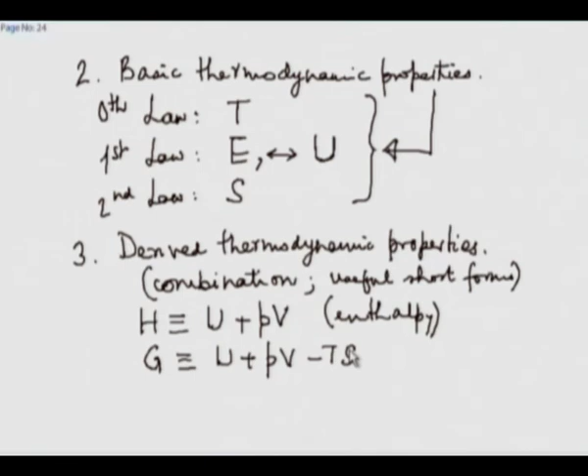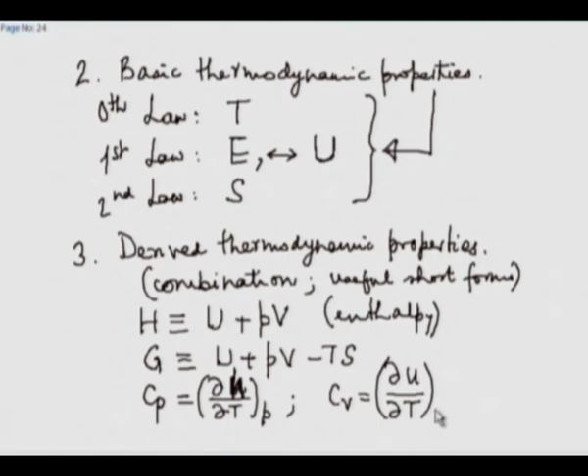There are properties which are derivatives. For example, Cp, partial of H with respect to T at constant P. Similarly, Cv, partial of U with respect to T at constant V. The so-called specific heats, an unfortunate name, we will discuss that later, but these are derived thermodynamic properties. And such derived properties are common in other branches of physics. For example, stress, strain are properties, useful characteristics in solid mechanics. Okay. Their ratio, the Young's modulus, is a derived property.